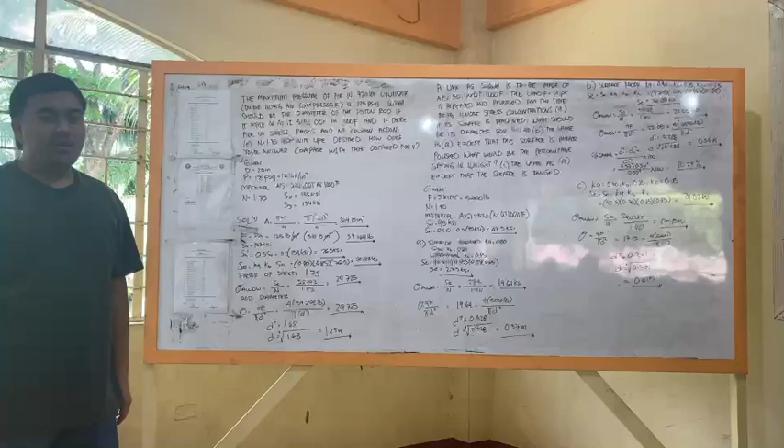Today I'm going to present the machine design problem. So the first problem is, the maximum pressure of air in a 20-inch cylinder double-acting air compressor is 125 PSIG. What should be the diameter of the piston rod if it's made of AISI 3140 OQT at 1000 F, and if there are no stress raisers and no column action, with factor of safety equal to 1.75, indefinite life design.

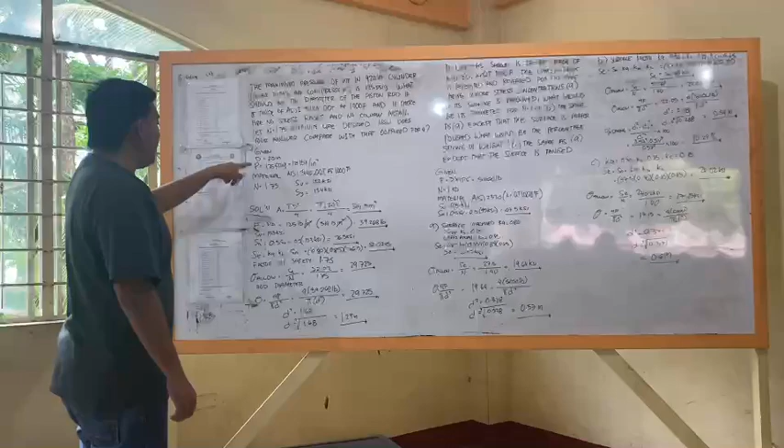How does your answer compare with that obtained before? So these are the following givens. Diameter is equal to 20 inch, pressure of 125, converted to pound force per inch squared. The material, AISI stands for American Iron and Steel Institute, is 3140 OQT at 1000 Fahrenheit. The factor of safety is 1.75, Su is 153 ksi, Sy is 134 ksi.

So first, we're going to find the area. The formula for area is pi d squared over 4. Substitute the value to get 314 inch squared. Then we multiply the pressure times area, 125 pounds over inch squared times 314.15 inch squared, and cancel out the inch to get 39,268 pounds. So Sn is equal to 0.5 multiplied by 153, which gives 76.5 ksi.

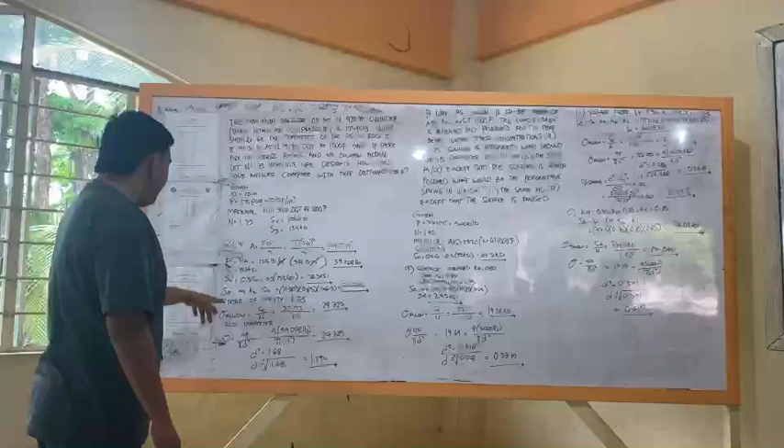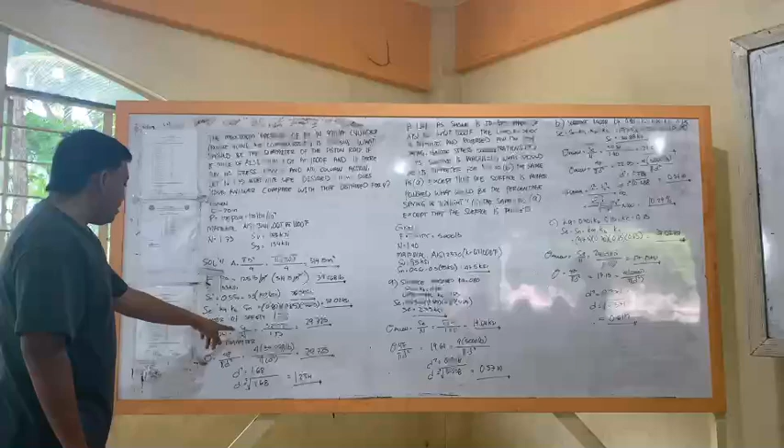Then Se is Ka times Kb times Sn, equal to 0.8 times 0.85 times 76.5, so Se is equal to 52.02 ksi. The factor of safety is 1.75. The allowable stress is equal to Se over N. So 52.02 divided by factor of safety of 1.75 gives 29.725.

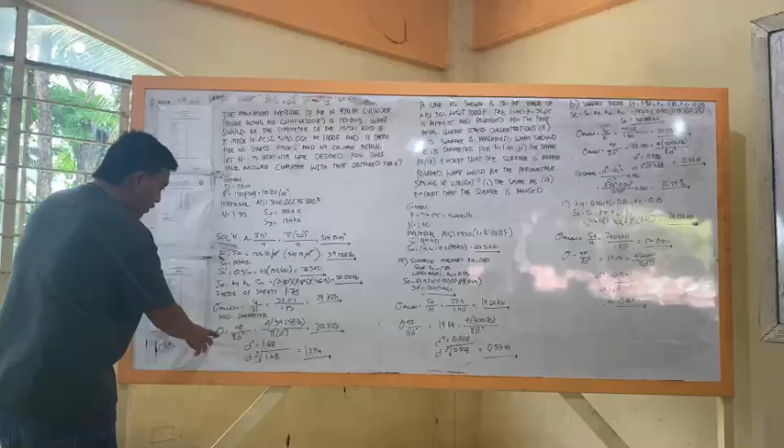So for the rod diameter, we put in the value 29.725 for F over 1000 pi d squared over 4. We substitute it to get the answer of 1.29.

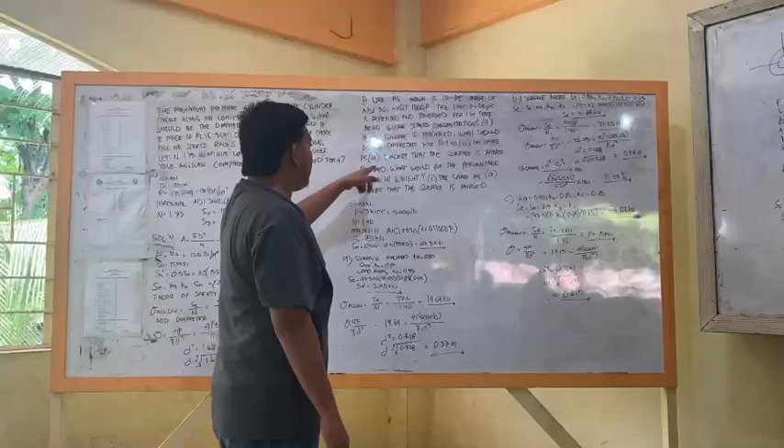So the second problem, a link is to be made of AISI 2330 at 1000 Fahrenheit. The load of 5 kips is repeated and reversed. For the time being, ignore the stress concentration. A, if its surface is machined, what should be its diameter for N of 1.40? B, the same as A, except that the surface is mirror polished. What would be the percentage saving in weight? C, the same as A, except that the surface is as forged.

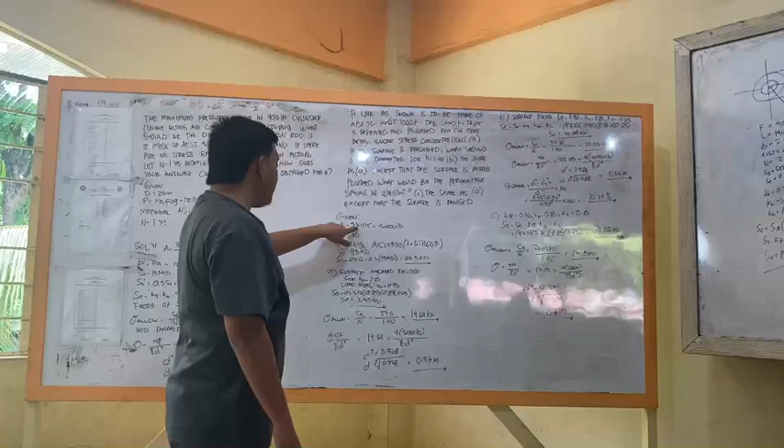So these are the following givens. Force of 5 kips, then we multiply by 1000 to get this value; 1 kip is equal to 1000 pounds. Factor of safety of 1.40. Material, American Iron and Steel Institute 2330. Su of 95 ksi. Then Sn is 0.5 times Su, equal to 47.5 ksi.

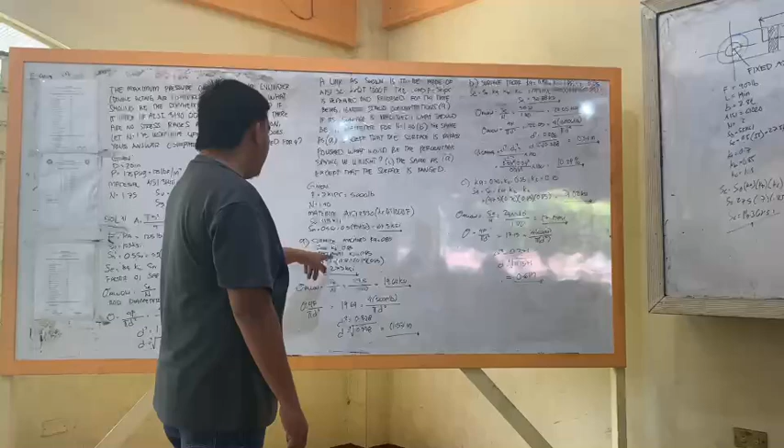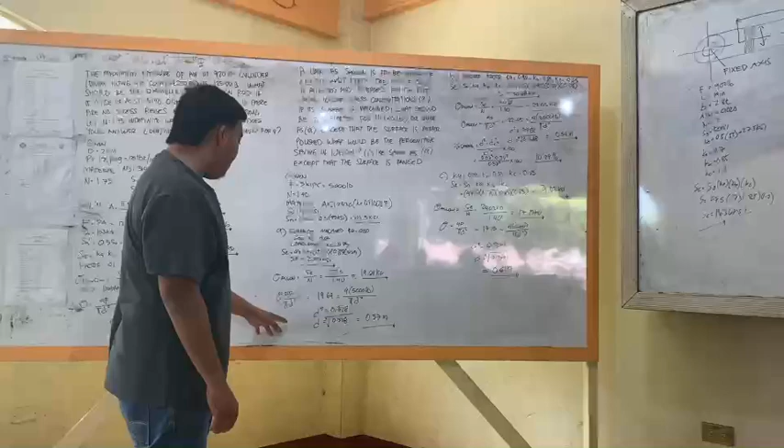So A, surface machined, Ka is equal to 0.80. The load is axial, Kc is equal to 0.85. Se is 47.5 times the factors, equal to 27.5. So the allowable is 27.5 divided by 1.40, which is 19.64 ksi. Then the diameter is just the same as number 1; we substitute the value and shift solve to get this answer.

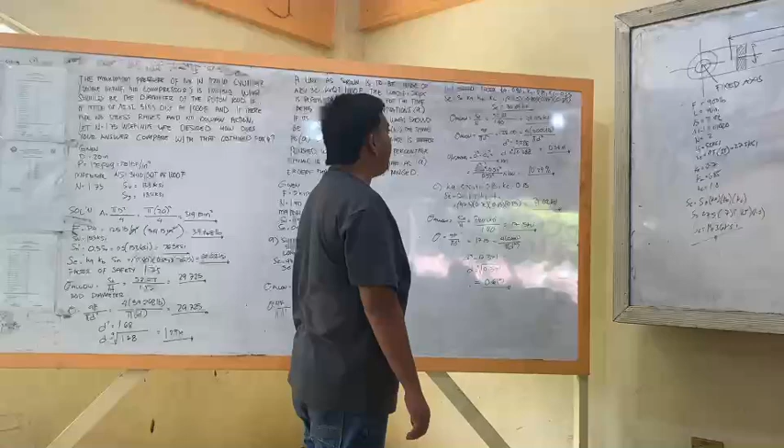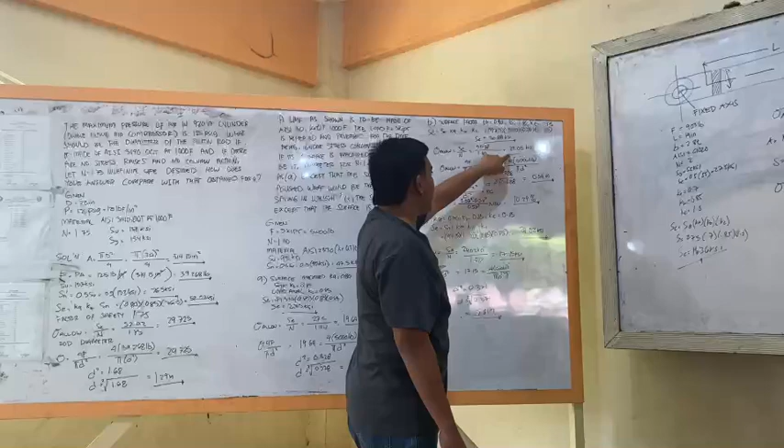In B, surface factor Ka is equal to 0.90, Kb is 0.85, Kc is 0.85. Se is equal to Sn times Ka times Kb times Kc. Substitute the values to get 30.88 ksi. So the allowable is 30.88 divided by factor of safety of 1.40, which is 22.05 ksi. With the same formula, we get the diameter by substituting the values, then shift solve. So the diameter is 0.54.

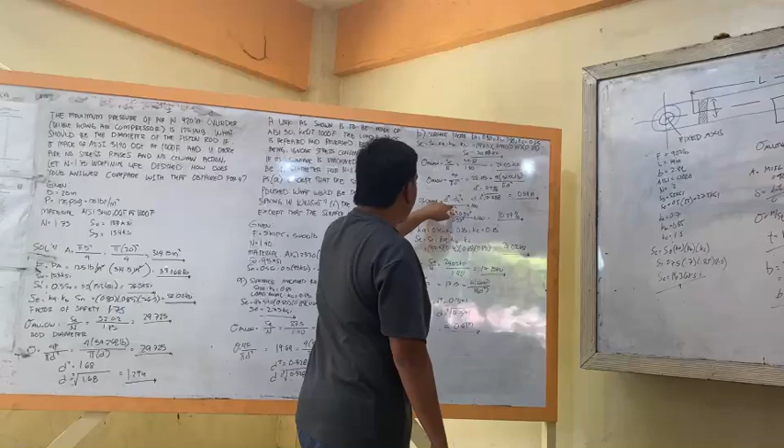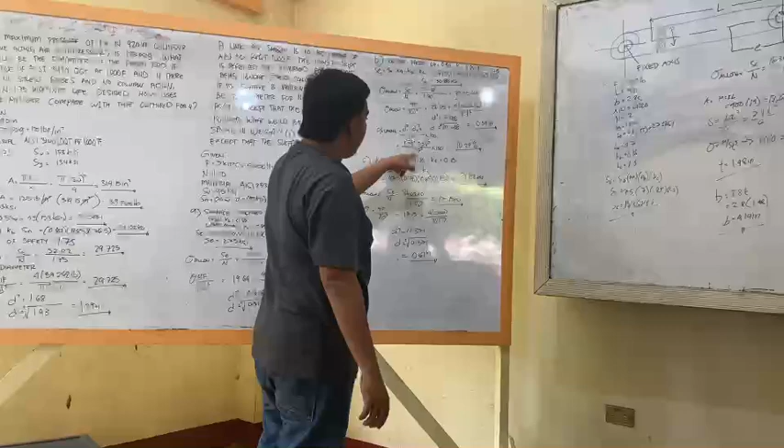To get the percentage, we use this formula: diameter 1 squared minus diameter 2 squared over diameter 1 squared times 100. So diameter 1 of 0.57 squared minus 0.54 squared over 0.57 squared is equal to 0.1029, then multiply by 100 to get 10.29%.

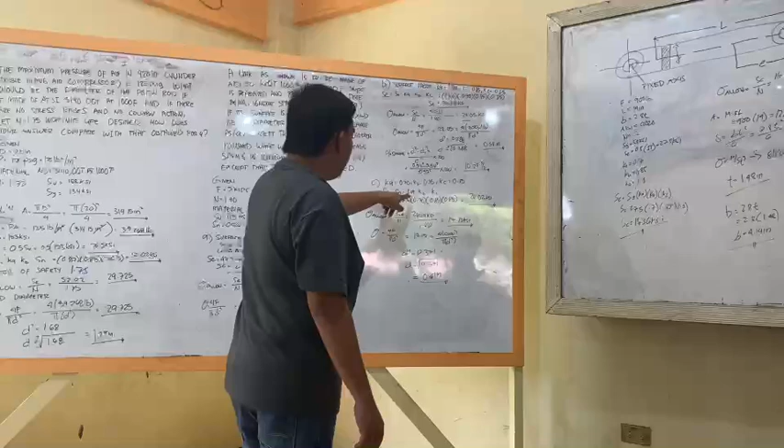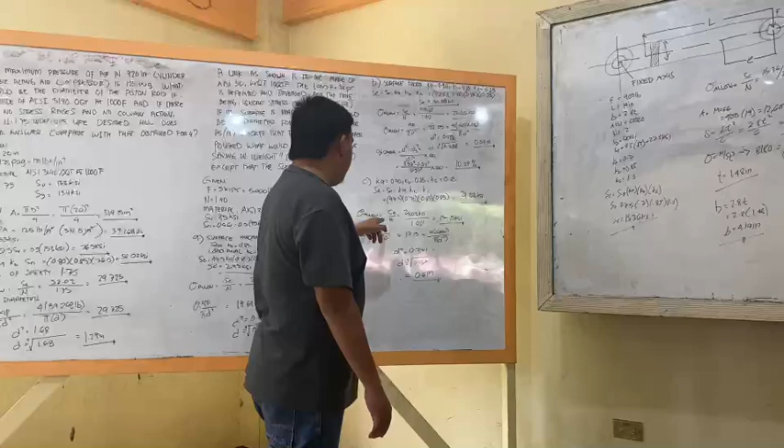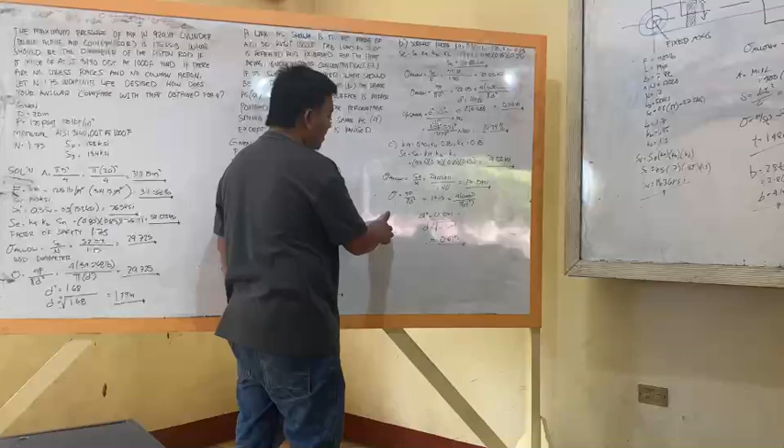Letter C. Ka is 0.70, Kb is 0.85, Kc is 0.85. Substitute all the values, then multiply to get 24.02 ksi. With the same formula, we divide it to get the allowable stress. Then the formula for the diameter is just the same. Substitute all the given values, and the diameter is 0.61 inch.

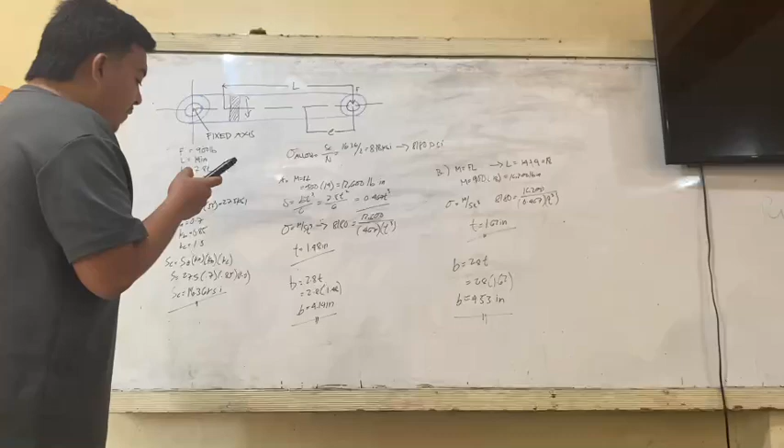A lever as shown with a rectangular section is to be designed for indefinite life and a reversed load of force equal to 900 pounds. Find the dimensions of the section without discontinuity where b is equal to 2.8t and length of 14 inch, for a design factor of 2, with material AISI C1020 as rolled, with an as-forged surface. B, compute the dimensions of the section where e is equal to 4.

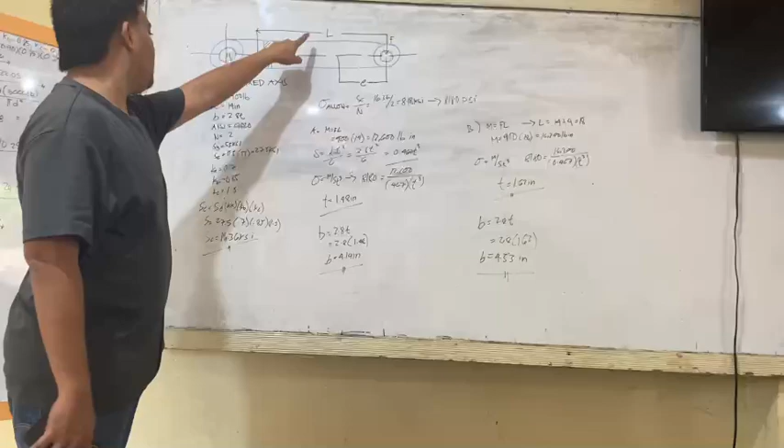So this is the diagram for number 8. We have force of 900 pounds, total length of 14 inch, b of 2.8t, and the AISI material is C1020, factor of safety of 2. So Su is 55 ksi, then we multiply it by 0.5 to get Sn equal to 27.5 ksi. So these are the following givens.

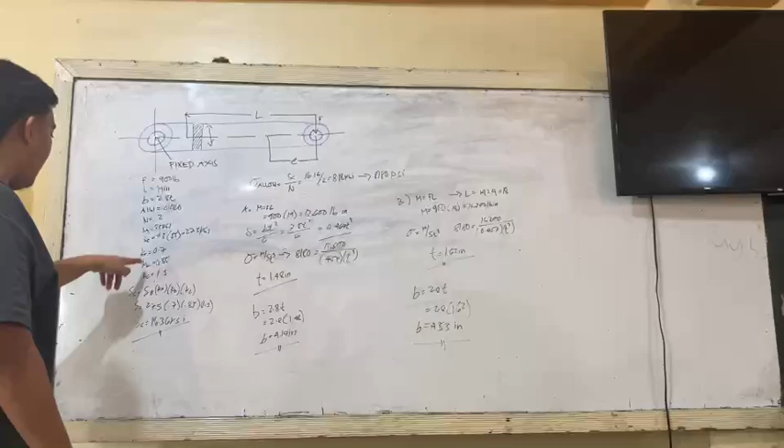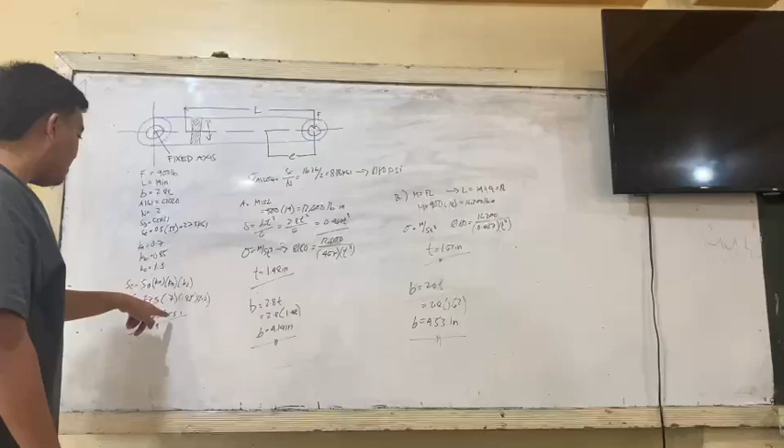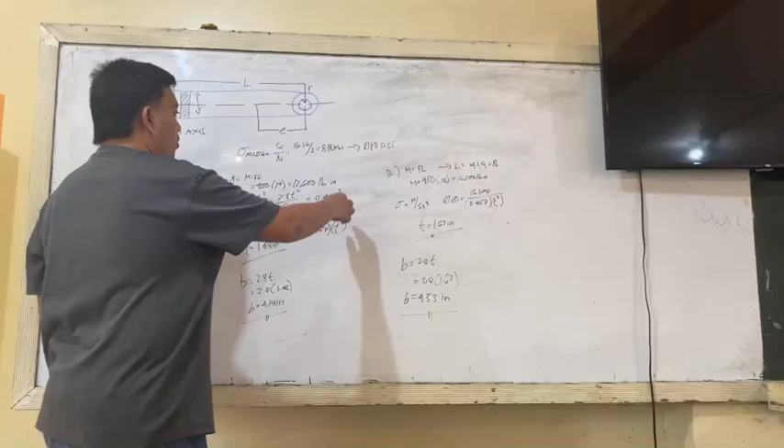Ka is equal to 0.7, Kb is 0.85, Kc is 1.0. To find Se, we substitute all the values to get 16.36 ksi. So the allowable stress is Se over factor of safety of 2: 16.36 divided by 2 is 8.18 ksi, or converted to psi, 8,180.

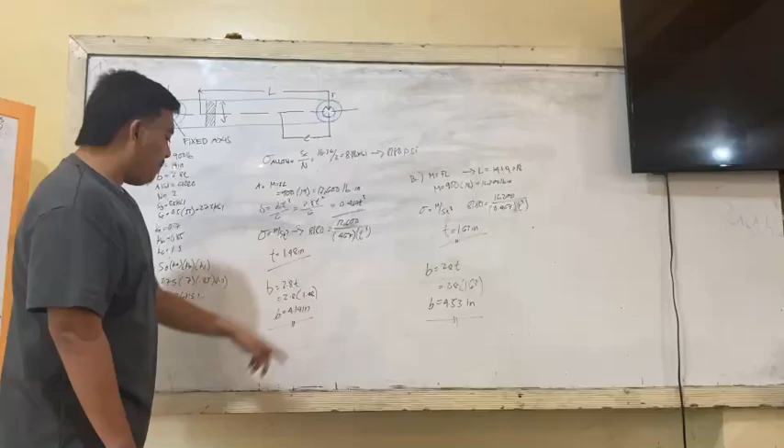So A, to find the moment, we multiply the force and length. Force of 900 times 14 inch is equal to 12,600 pound-inch. Then we substitute the values to find the section modulus. S is equal to bt squared over 6, equal to 2.8t times t squared over 6, equal to 0.467 t cubed. So the allowable stress is M over S: 8,180 is equal to 12,600 over 0.467 t cubed. Solving, t is 1.48. To find b, we substitute the value for t, 1.48, to get 4.14 inch.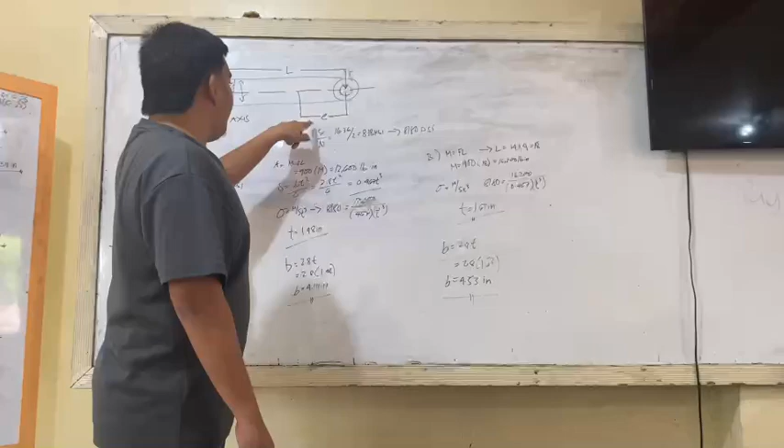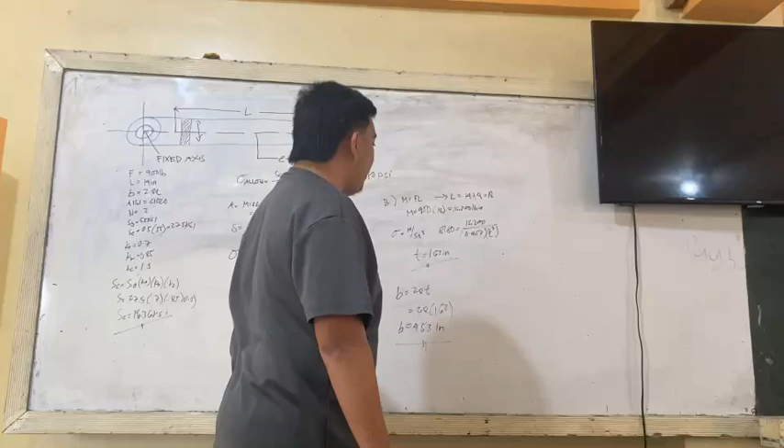B is just the same but different in total length, because there is another length e of 4 inch, and we add 14 plus 4 is 18. So 900 times 18 is equal to 16,200. Then we do the same: 8,180 is equal to 16,200 over 0.467 t cubed. t is 1.62. Then for b, we substitute the value for t: 2.8 times 1.62 is equal to 4.53 inches. So these are the answers.